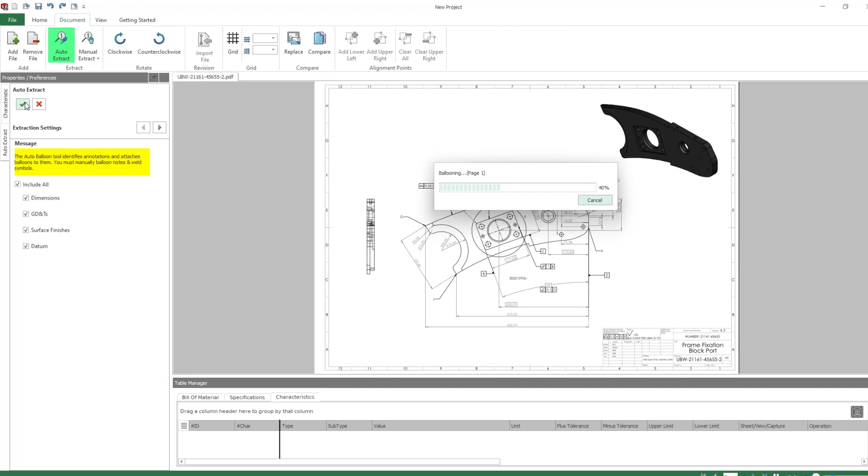SOLIDWORKS Inspection has always sought to dramatically reduce the amount of time and effort required to create first article inspection documentation. SOLIDWORKS Inspection 2023 takes that ethos up a level, with improvements in speed, control, and consistency.

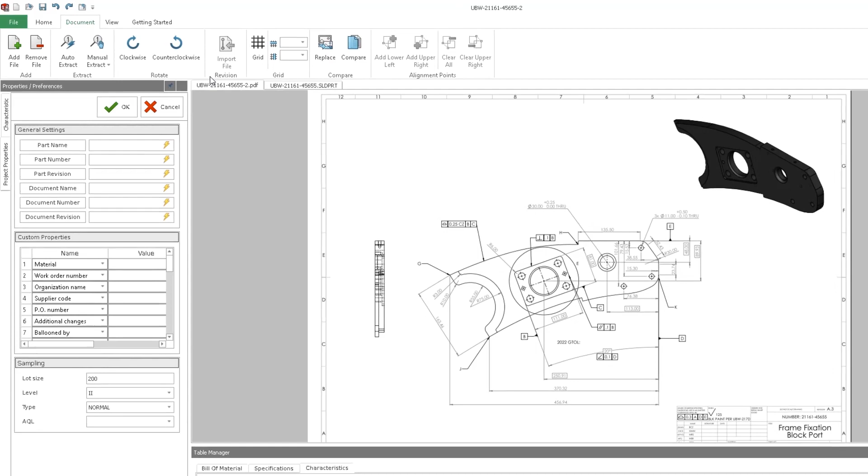For 2023, standalone inspection gets a clean new look with a whole interface update. This new interface is more concise, making each option clear and easy to identify.

Current and new standalone users alike will be thrilled to discover that the all-new auto-ballooning capability now extends to file formats such as PDF files.

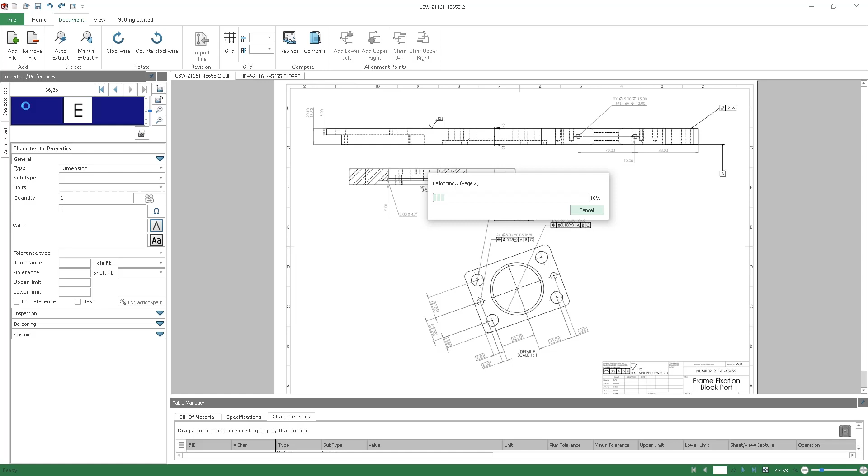The previously existing Smart Extract feature has been replaced with the new Auto Extract command. The Auto Extract command is now a one-stop shop that handles auto-ballooning for all supported file formats, 2D or 3D. This provides an enormous jumpstart to the process and will save huge amounts of time in setting up inspection reports

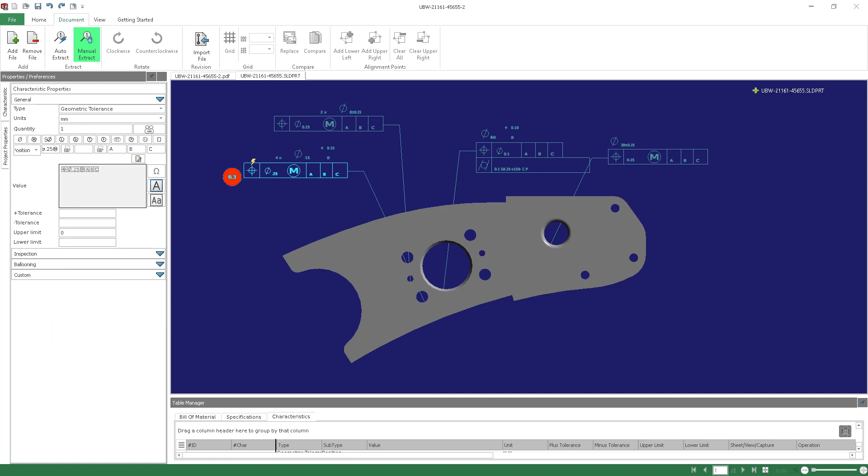from PDF files. Inspection brings added intelligence to cases where manual ballooning is used as well. Manual extract will now identify the characteristics selected and eliminates the need to switch back and forth between specific tools.

When working with the SOLIDWORKS add-in, inspection setup can now be fine-tuned with a set of criteria. Sequences can now be created and named for future use. These sequences set a custom starting point that can be applied for a variety of purposes.

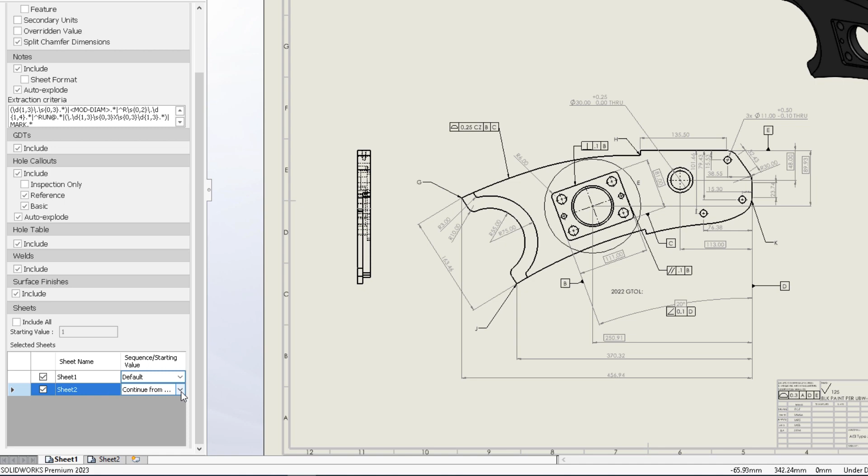Auto Extract can now be limited by sheet as well for an added level of control. By default, all sheets will be included with a default starting value, which can of course be adjusted. Each sheet can now follow its own sequence or continue from the previous sheet's numbering.

Take advantage of the power of automated ballooning in more situations than ever before, with added control over sheets and sequences.

Cleanup and reorganization has been enhanced as well. The characteristic tree now provides a pane where balloon numbering can be viewed and modified by sheet or drawing view.

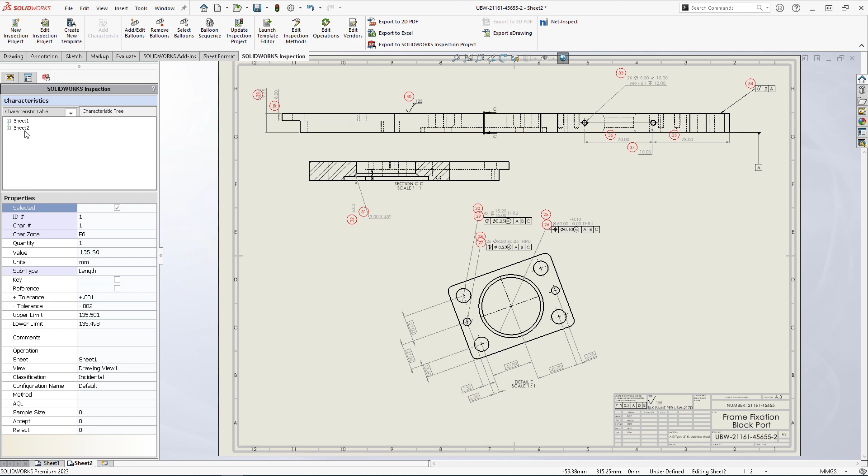Reordering all balloons at once is now as easy as drag and drop to reorder sheets. All balloons involved will automatically be updated instantaneously. Likewise, reordering a drawing view results in the same effect.

In the characteristic table, balloons can be reordered by view or manually dragged.

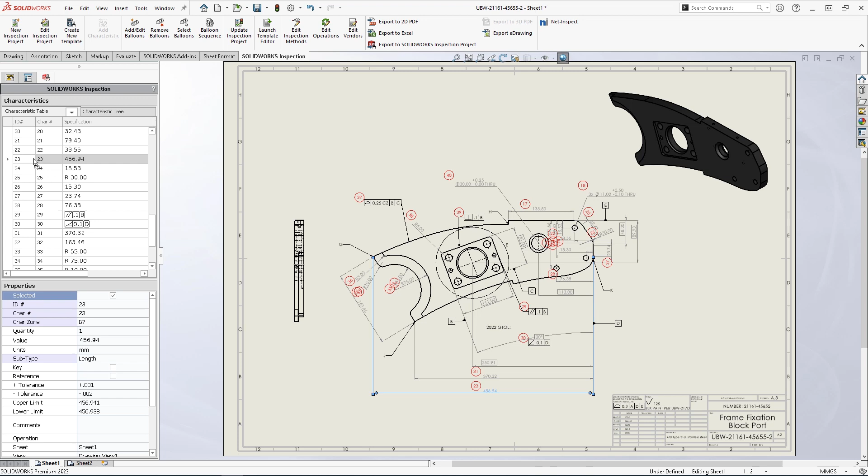Along with the ability to fine-tune ballooning per sheet comes the export of multiple sheets as well. Just like creating balloons per sheet, the export options now allow for control over included sheets per document. This applies to PDF exports as well as Excel outputs.

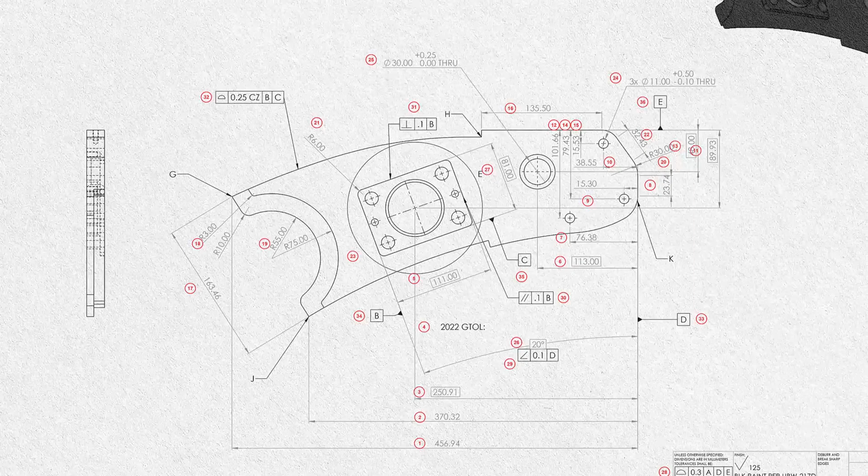SOLIDWORKS Inspection is more consistent, more intelligent, more efficient than ever before. Take advantage of the power, retain the control, and get your inspection documentation done faster with Inspection 2023.